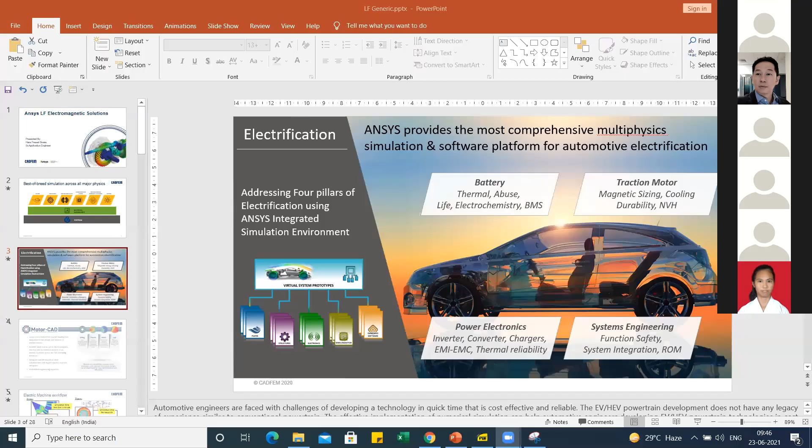Okay, maybe we can start with the first session for low frequency or even high frequency. 25 minutes has been allocated for your session. Mr. Sivala, thank you. Thank you, Eddie, thanks for the nice introduction. Let me start sharing my screen. I hope you guys are able to see my screen, could you please confirm that? Yes, it's all good, yes, go ahead. Thank you, okay. So just let me know in case if my audio or anything is not proper, then I will try to correct myself. Okay, no problems. Thank you, yeah, thank you, Eddie.

So hi, good morning to everyone. Myself, Haraprasad Sivala, and I'm working as an application engineer in CADFEM. And basically, I will take care about this low frequency part.

Before going to the technicalities of Ansys Maxwell, I will give you a couple of slides on what Ansys can offer you on the overall platform and what exactly Ansys is, in a nutshell, just a couple of minutes. So Ansys, I can say, is the market leader in the simulation platform. The reason is very simple, it's purely into the simulation. We don't want, there is nothing into the CAD platform or anything, it is completely concentrated into the simulation platform. And the beauty is it has the footprints in each and every major physics.

You can name with the structures, it might be started, then after they have acquired a lot of solutions like fluids or electromagnetics and embeddeds. Or recently, they have also acquired a couple of simulation softwares on the optical side. So you can understand that Ansys has footprint in each and every physics. The beauty is it's not that we are into every physics, the major physics can talk to each other on a single platform, so that's the beauty of Ansys, and we can integrate those things in a single platform. So Ansys can offer you the best of breed simulations across the major physics, and it can be a one-stop solution for your challenges as well.

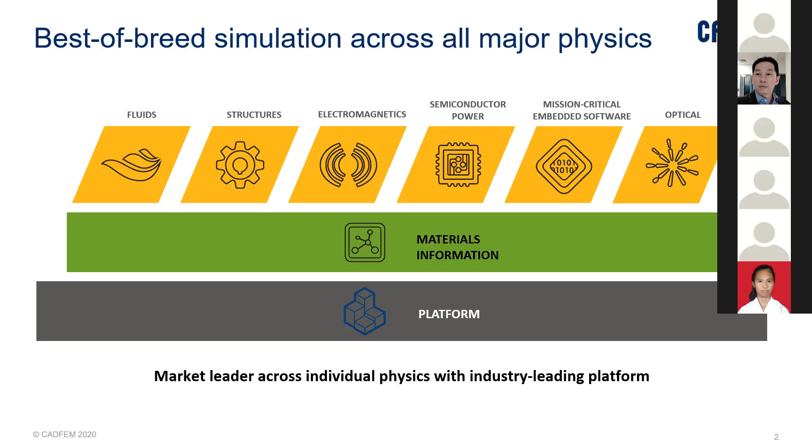This is just one slide where Ansys can offer you, if anyone is interested in the electric vehicle market, Ansys can offer you a 360 degree platform where you can see the major components, might be the battery, or traction motors, or power electronics, or system engineering. So Ansys has solutions for all these major components to address the different challenges from different physics, or different applications. So today's topic would be mostly on this Ansys Maxwell capabilities and what applications it can handle.

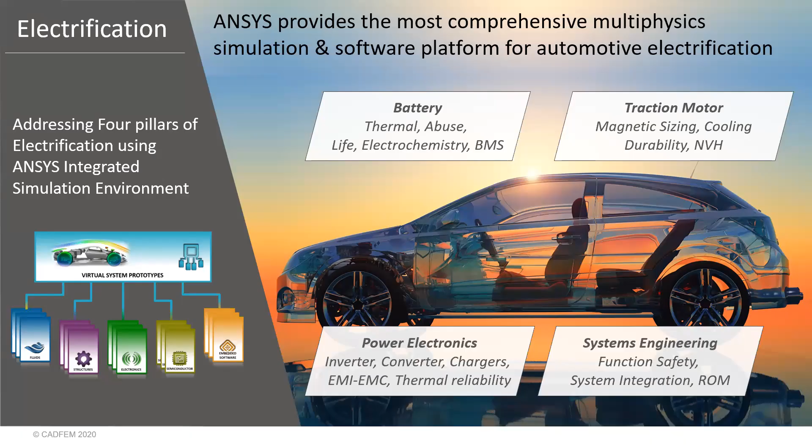If you talk about Ansys Maxwell, I can say this would be the high fidelity, generic electromagnetic software for low frequency. So before jumping into the Ansys Maxwell technicalities, I will give you a brief difference between low frequency and high frequency.

In the Ansys electronics platform itself, we have two things: low frequency and high frequency. Low frequency means the frequency range where that particular application is working, which decides whether it belongs to low frequency or high frequency applications. In our case, the frequency will start from certain zero frequency to a couple of megahertz. There is no hard stop, but it would be somewhere around 40 or 50 megahertz.

You can go up to that. At the same time, high frequency will start from certain kilohertz to gigahertz and more. Of course, there is a band where the frequencies can overlap, and it always depends on which particular application or tool is suitable for that analysis. According to that, we choose whether to go with Ansys low frequency solvers or high frequency solvers. So that is the basic difference.

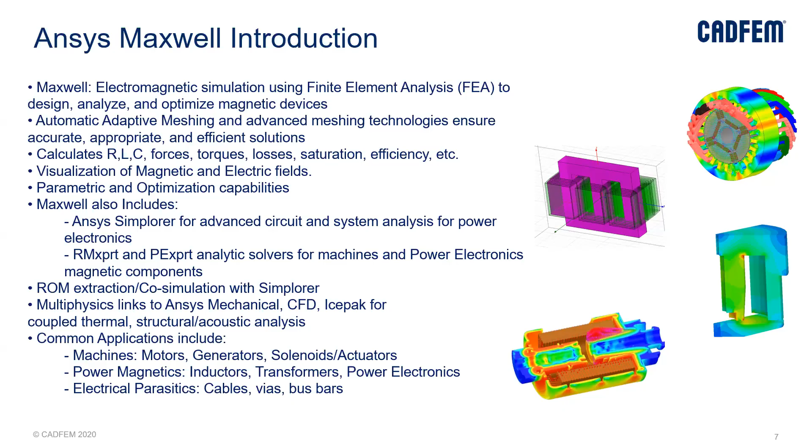Apart from these things, it can offer you the complete set of electrical and magnetic fields. Basically it is built on 4 basic Maxwell equations, where you can take Faraday's law and Gauss's law for both electricity and magnetism, as well as Ampere's law. By using those 4 basic Maxwell equations, they have implemented this Ansys Maxwell solver, which will help us to understand the magnetic as well as electrical phenomena of these particular applications.

And it can also do a couple of optimizations. It has an optimizer inside which will help us do some parametric based optimization. If you talk about post processing, the outcome you are getting out of these things is, if you take any component like an actuator, transformer, motor or generator, it can give you all electromagnetic outputs, like forces for linear motions, or torque for rotational motions, or losses on copper components or steel materials. Or if you want to check the efficiency of a particular component, yes, you can do those things. All these things can be given to us by this Ansys Maxwell solver.

And it has its own set of solvers. It has some certain template based solvers, you can see RMxprt and PExprt, which I'm going to talk about in the coming slides.

As well, the beauty with this Ansys Maxwell solver is it will take some reduced order model technology, which is nothing but you can do the field calculations here, and this field component, this physics based component, can be integrated to your system level solvers, where you can use this physics based model without losing the accuracy. That's what we call reduced order model technology.

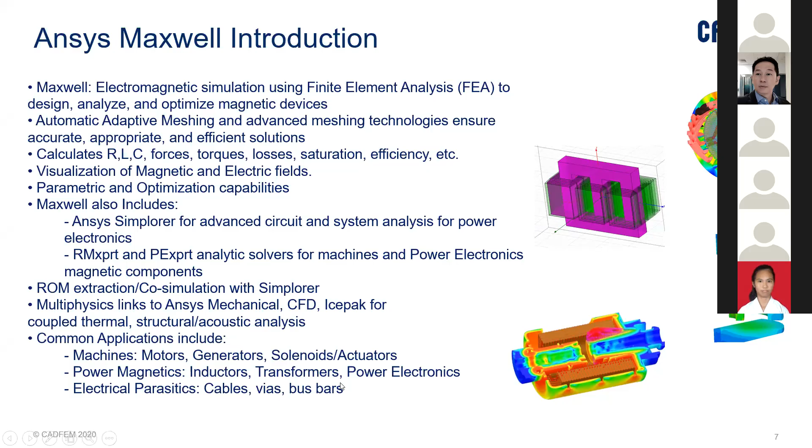As mentioned in the previous slide, we have a couple of advantages in the Ansys Maxwell solver itself. Once you go with that particular licensing, you will also get this basic Simplorer as well as RMxprt and PExprt. These are, I can say, dedicated 1D platforms basically.

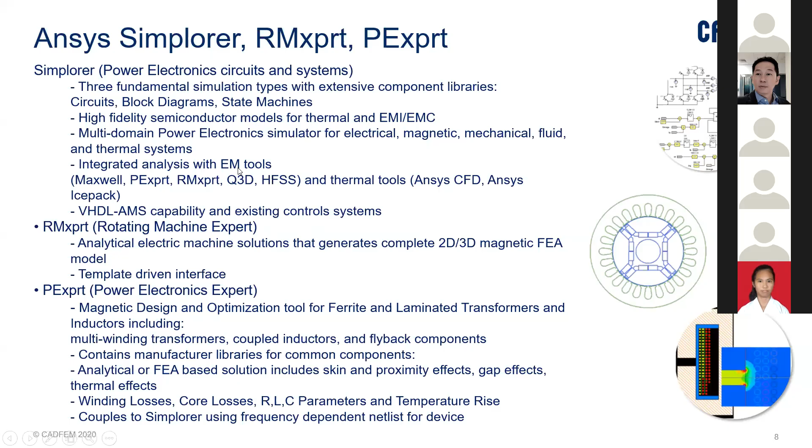Simplorer is a kind of system level solver, or a multi-domain system level solver, where you can integrate physics based models into these particular solvers. It already has template based models for electrical, magnetic, mechanical, fluids, or anything you can take it as. It has already defined 1D models, and you can just drag and drop to work with these particular things.

The next one is RMxprt, which is nothing but rotating machine expert. If somebody is interested in electrical motors or generators, they can work directly with this analytical solver for initial level calculations, and it is integrated inside Ansys Maxwell. There is a direct coupling between RMxprt and Maxwell. Once you set up the model in RMxprt, it can directly create an FEA model for us.

PExprt is the same, which is nothing but the power electronic expert, which will give us an idea on electronic transformers or any kind of structure, toroidal structures, or inductors. All those things can be solved here. This is also a kind of 1D platform, which can be integrated to Ansys Maxwell for high fidelity FEA simulations.

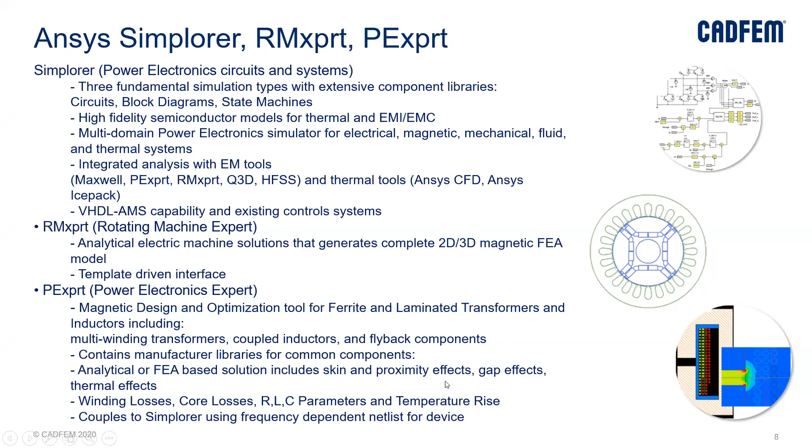Once we're done with the basic geometry setup or anything, then you can directly go for material modeling. Obviously, when dealing with high fidelity solvers, the major important thing is that we need to concentrate on material modeling. How accurately you model the materials, that much accurately we can get the particular application performance. That's where Ansys, I can say, is a step forward compared with other solvers.

You can model either linear or non-linear materials, isotropic or anisotropic properties, which are changing the material properties with respect to direction, or you can check temperature dependent materials also. We can also create models with temperature dependent materials, as well as consider hysteresis modeling, where you can consider minor loops also.

If you want to properly model core losses, we have temperature dependent core losses that can be modeled here. And if you want to check magnetostriction, or inverse magnetostriction, where you want to check mechanical stress on magnetic components, that kind of advanced material modeling can be done in Ansys Maxwell solvers.

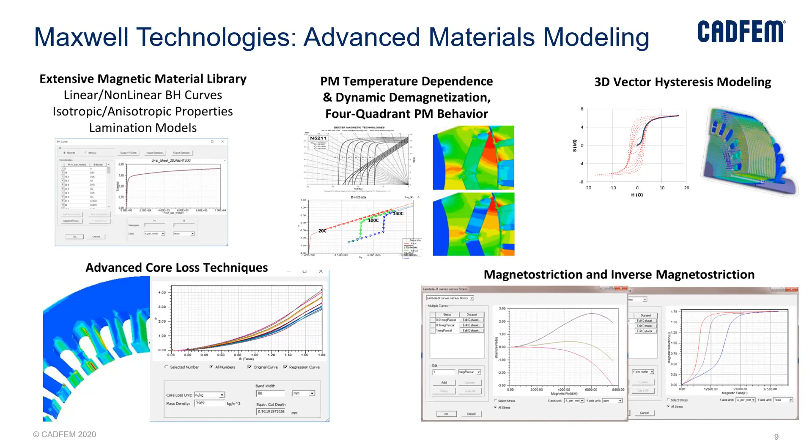The next part would be obviously the meshing part, because we are dealing with finite element mesh. Here, as an electromagnetic engineer, we are not pretty sure on finite element methods. But still, Ansys can offer you the technique called auto adaptive meshing technology. Even if you are not familiar with the finite element method, it will offer you automatic meshing.

Once you define the number of iterations, it will automatically define the proper and accurate mesh for us to reach finer and finer results.

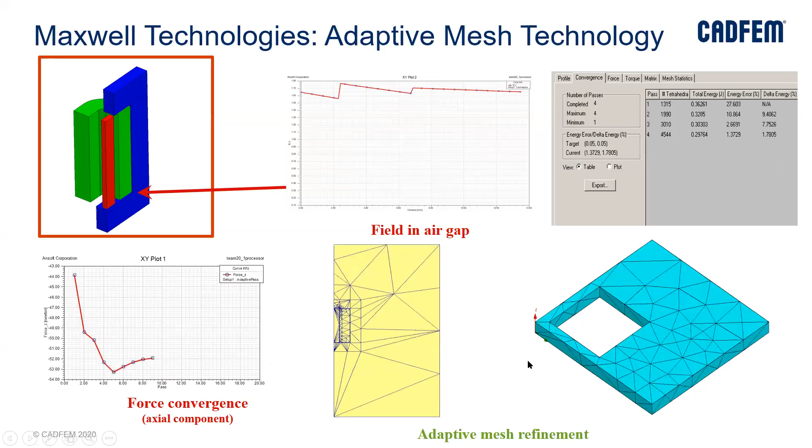In case you are still not satisfied with this auto adaptive meshing technology, we can use manual control mesh, whether it might be first order or second order elements. You can control this manual mesh and reach high-end accurate mesh elements. There are different kinds of manual control mesh techniques available, which we can use to properly get the dense mesh on our applications.

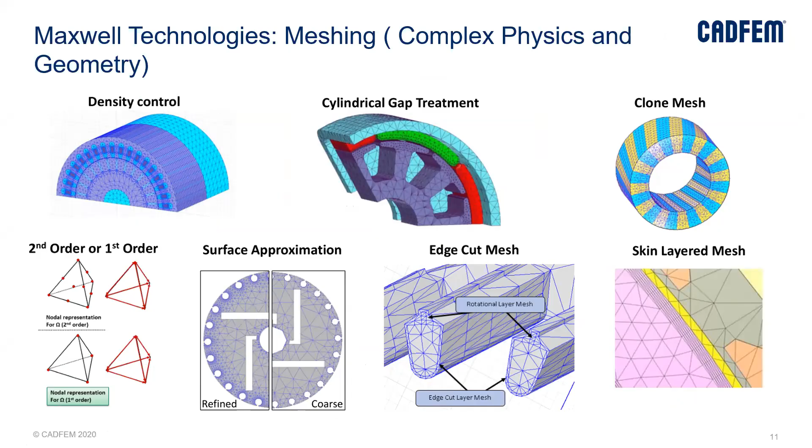When dealing with high fidelity solvers, time is a major concern for simulations because it's dealing with the finite element method. So to speed up the simulations, Ansys Maxwell has certain solutions like TDM and DDM methodologies, where it will do multi-threading. You can use multiple cores to run the simulations, as well as run simulation points simultaneously. This reduces the amount of simulation time spent on a particular simulation run, as well as increases productivity.

And with this, you can properly model accurate ROMs. Here is a test case. In the initial cases, it took somewhere around 15 days, but after scaling up with respect to these HPC, TDM methodologies and using HPC performance, it can reduce it to 5 hours. You can see how drastic a change has been implemented here, but of course it needs a finer number of cores to reach this position.

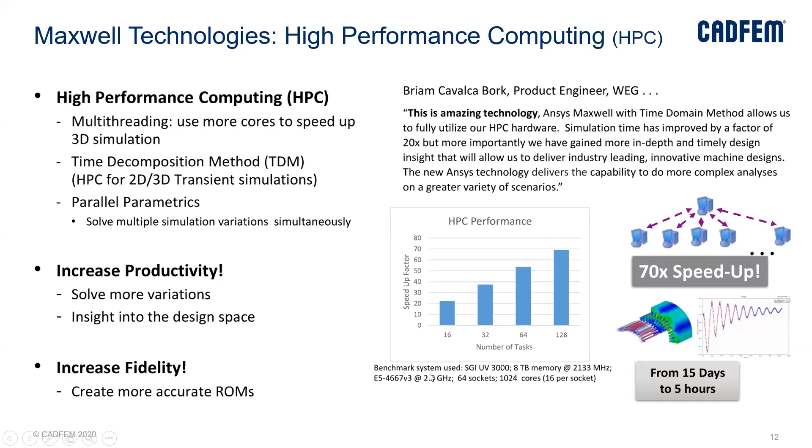So far we discussed completely the electromagnetic side, but we haven't discussed the multi-physics environment. What if some challenges come from the multi-physics environment, which are related to or combined with the electromagnetic solvers? How can Ansys handle these problems? Here is the solution.

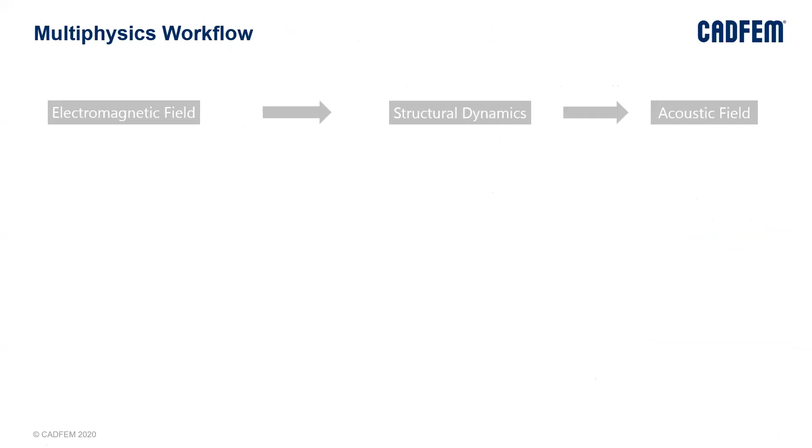For example, if you take a motor and want to check the vibration behavior, I have simulated the motor in the electromagnetic solver called Ansys Maxwell, integrated into our platform called Ansys Workbench. The electromagnetic solver solutions are directly coupled to the mechanical solvers. We are extracting the loads, or the electromagnetic forces, on the stator tooth, and these are directly mapped onto the mechanical solver to check the vibration behavior and structural deformation on the stator tooth.

The problem here is you can run at a single RPM, or when running at multiple RPMs, it can also simulate. That is the beauty of Ansys and these platforms. Either the mechanical and structural part, or the acoustic part, everything can be integrated in a single GUI with just a drag and drop methodology. We no need to export or import files or anything, it's a simple drag and drop methodology.

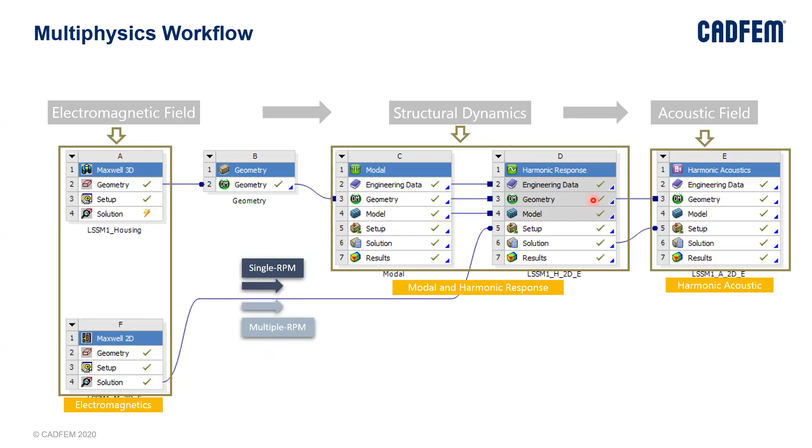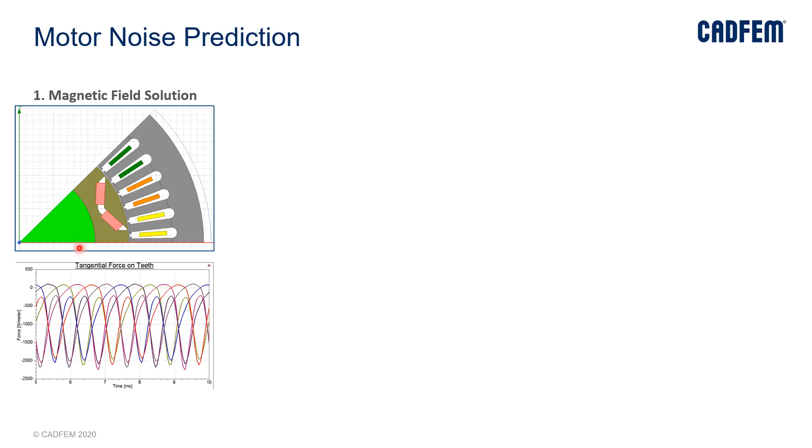Here you can see this simple approach I discussed previously. This is an electromagnetic simulation, electrical motor simulation, where we are computing the forces, and these forces are exported here. These are then, on the mechanical side, used to compute vibrations, and these vibrations are given as an input to the acoustics. Finally, you're able to hear the noise also.

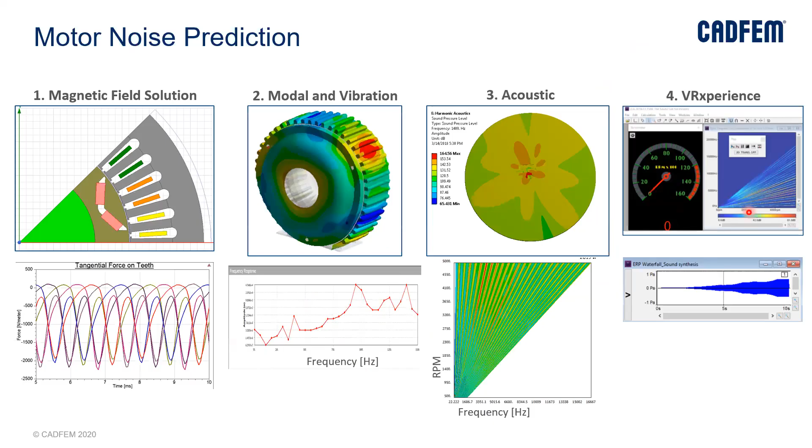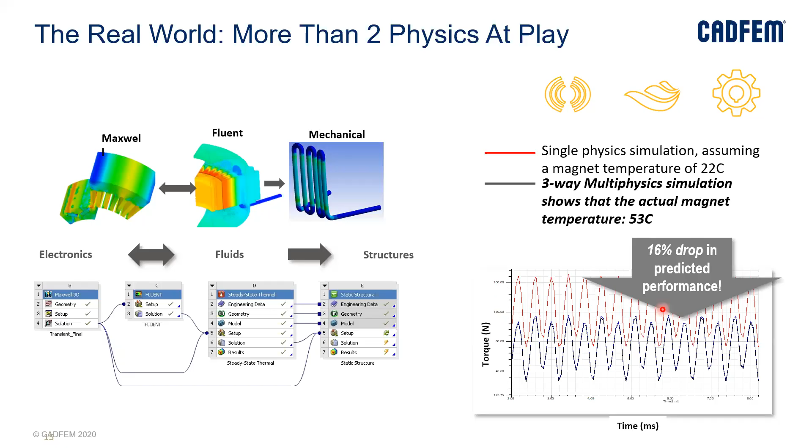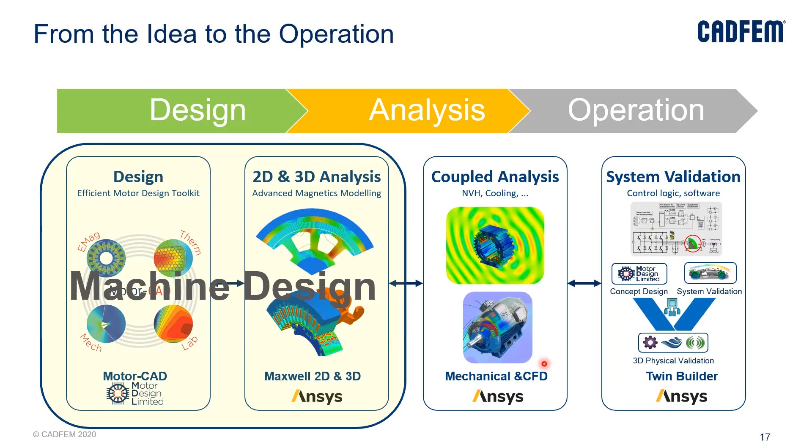So that is basically the capability side. There are a couple of slides on capability and applications, which I'll go through quickly. This is an environment for motors, where there's a design phase and an advanced phase of modeling. Once done, the next part is coupled analysis, as discussed in the previous slides, such as mechanical vibrations or temperature scenarios. Finally, this motor can be integrated into system level solvers to check how well the motor performs in the complete system.

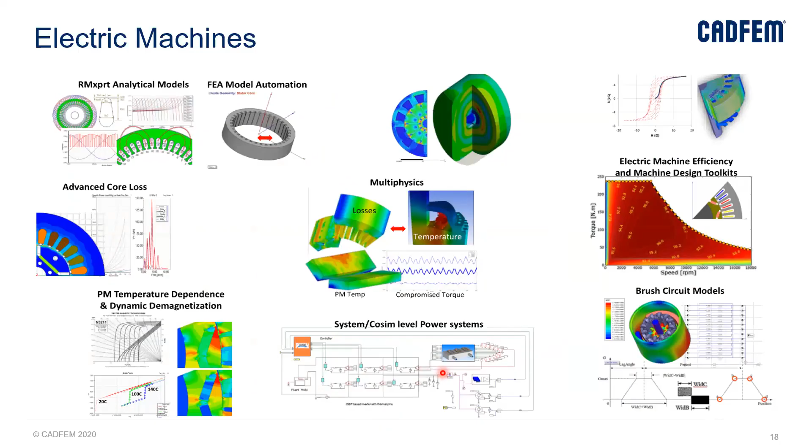Okay, here is the electrical machines, and there are a couple of things you can do, either initial phase analytical approaches or a detailed FEA approach. If you want to do the multi-physics environment, or check efficiency maps, or do complete system level analysis, or demagnetization effects, all those things can be addressed here.

And even for transformers also, if you take transformer or anything, that can be solved using the Ansys Maxwell solvers.

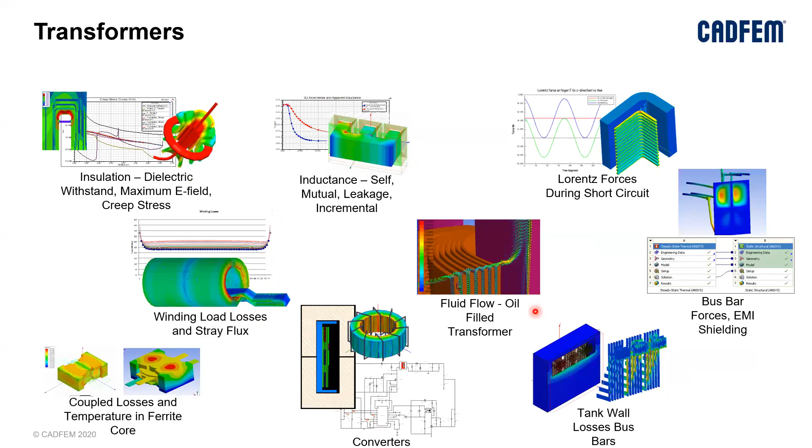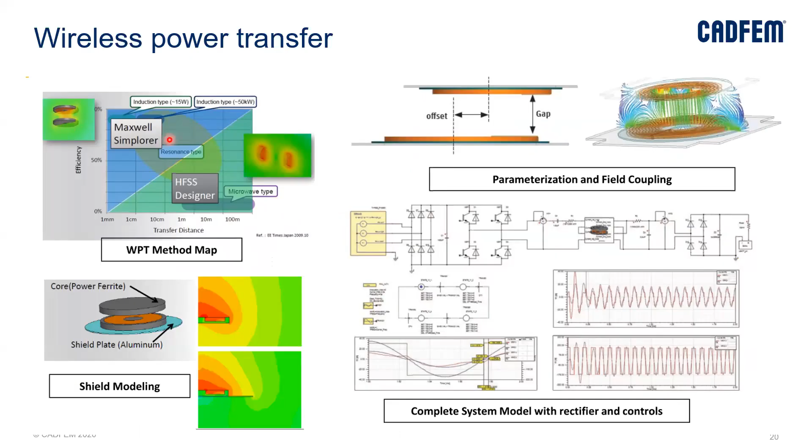And if somebody is interested in wireless power charging, that can be simulated either for inductive, or for resonance type inductive, or for microwave type wireless power transfer. Of course, the microwave type power transfer can be handled on the high frequency side, but for the induction type, yes, we can simulate in the low frequency solver called Ansys Maxwell.

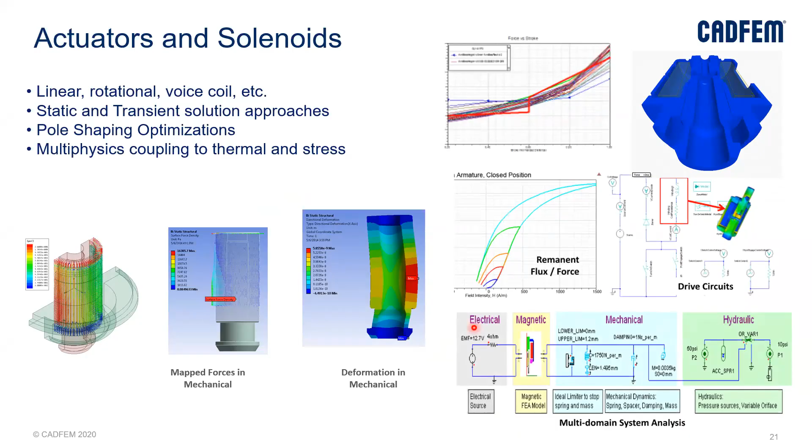And even for actuators also, if somebody is interested in actuator simulations, because that is also an electromechanical component where you can predict the linear motion. You can see what is the stroke position with respect to the distance, and what is the force acting on that particular plunger, and when you are exciting the coil, how much force is acting on the plunger - does it fine enough to overcome the spring force or not. So all these kinds of simulations can be handled using this electromagnetic solver.

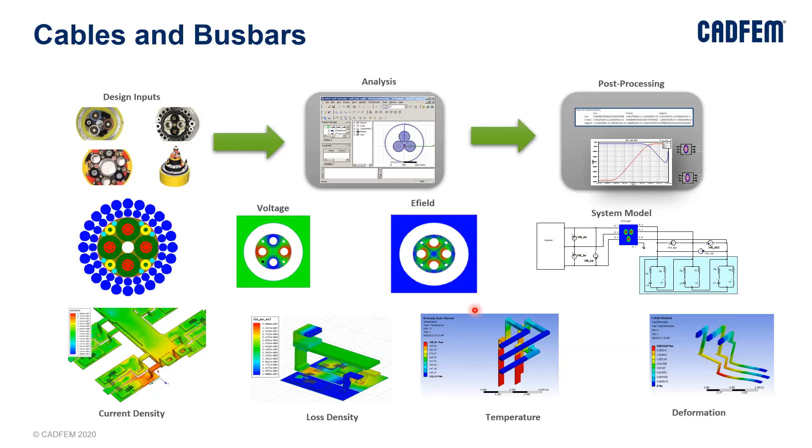And if you are interested in bus bar simulations, to check the losses, it means the bus bar insulation - if you want to check the dielectric capabilities of the insulation, as well as the structural deformations or the thermal performance of those bus bars or cables, all those things can be simulated using Ansys Maxwell solvers.

And if somebody is interested in sensors, the electromagnetic sensors - you can call them variable reluctance sensors, which you can find in bike wheels basically. And hall sensors, you can see eddy current flaw sensors, where you are using these things in tube, the boiler tubes it might be, to check the porosity and all.

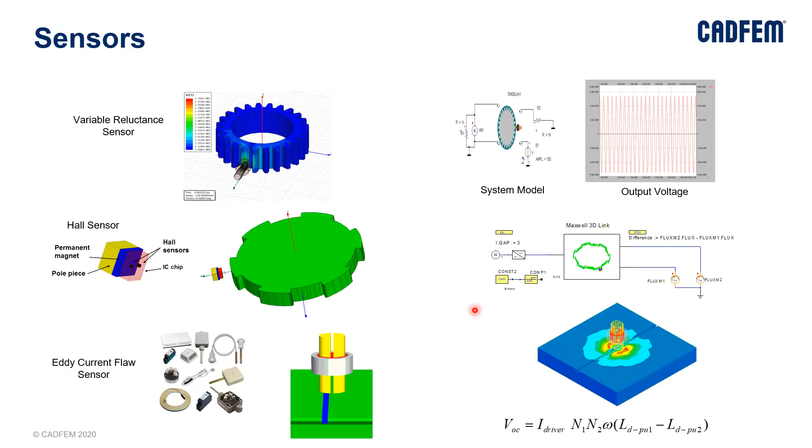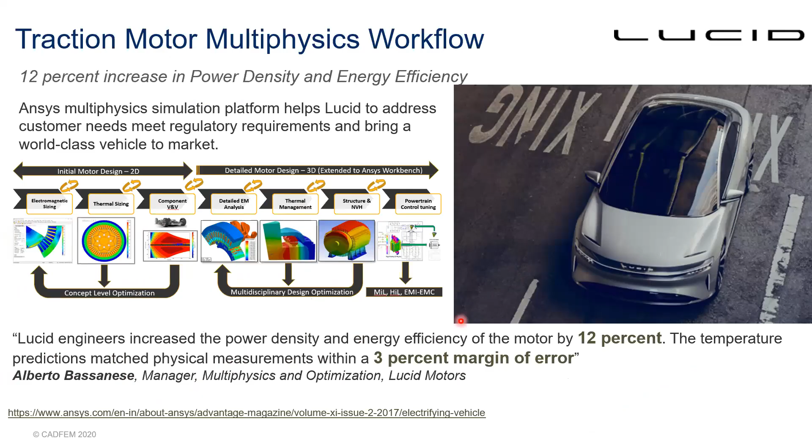So those are a couple of applications, and here is a case study on traction motors. You can see here, this is a competitor for Tesla on the EV side. They have used our solution to implement the electrical motors from a design phase to the complete system level solvers. You can see the comments from the Lucid guys, which we can share with you also. These are the case studies, so with this, I would like to stop.

If anyone has any queries, you can feel free to ask.

Okay, thank you, Mr. Shivala, for your informative and insightful presentation. I think we have seen how great and how capable this Ansys Maxwell is for low frequency applications. Just to save time, we would like to move on to the high frequency presentation, HFSS, by Mr. Tama.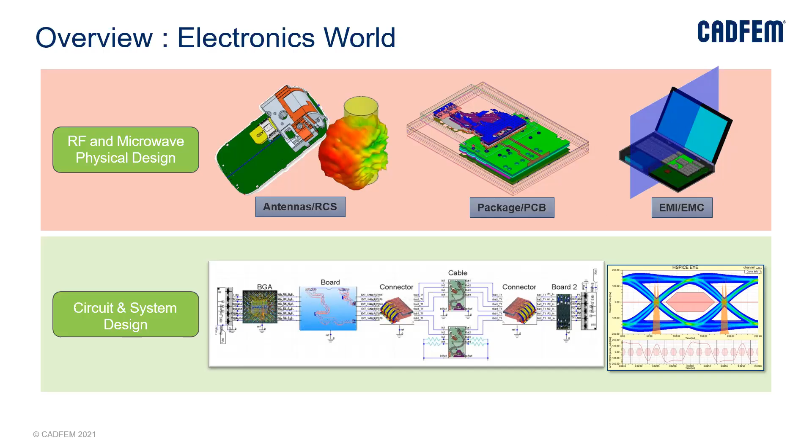The beauty of Ansys is that it is definitely a multi-physics platform, where you can do electromagnetic studies, thermal studies, as well as structural studies. Whatever losses come from the electromagnetic solver can be coupled to study the thermal behavior, and those thermal losses can be coupled to study the structural behavior also. So it is a complete multi-physics platform.

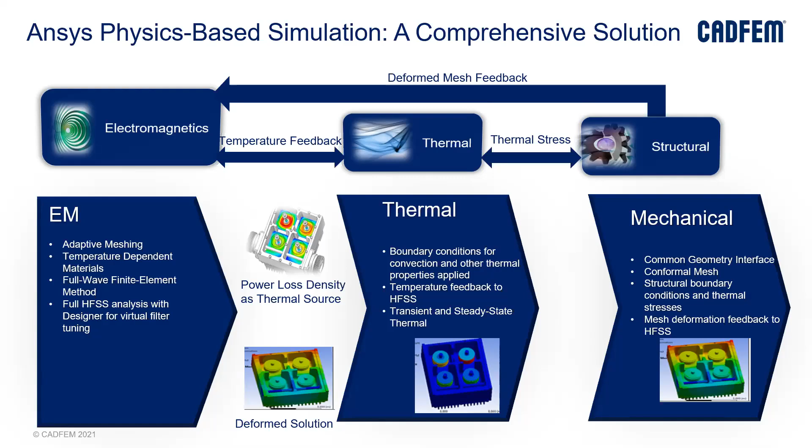In terms of transmission line basics, at low frequency, like AC signals or other low frequency signals, transmission is not a problem. The instantaneous voltage and current values remain the same across all positions of a cable or any transmission medium. But once we move up in frequency, the instantaneous current and voltage values change, and that causes the impedance to change.

So we call it characteristic impedance. Whenever characteristic impedance changes, the maximum power won't be transferred. The maximum power transfer theorem tells that the source and load impedance have to be the same. If it is not the same, there will be losses. That's why at high frequency, those components have to be properly designed so that the transmission losses are kept as low as possible. If it is more, there would be a larger problem.

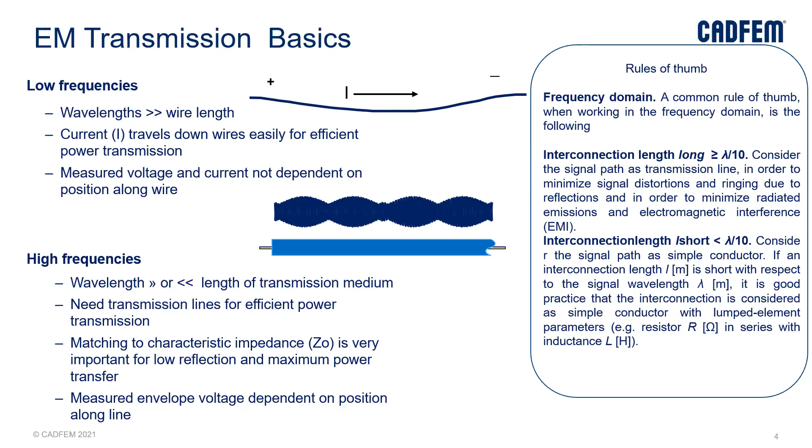Mostly we study this kind of losses in the frequency domain, not time domain. But in time domain also, some simulations can be done, though majorly we study this kind of losses in the frequency domain.

This is just one example of how losses happen in a high frequency device, but it's applicable even for low frequency devices also. You can consider any device, or what we call DUT, device under test, to be a simple lens. Any light incident on a lens - some light would be reflected back, some light would be refracted or transmitted within, across the medium.

So instead of a lens, it can be an antenna or any EM device - the same thing happens. Some energy would be reflected, some energy would be transmitted. When we divide the incident, reflected, and transmitted energy, we can extract parameters like the return loss. If it is a filter, it will be a loss. If it is an amplifier, we can see the gain of the amplifier. We can see the group delay. So all these studies can be done.

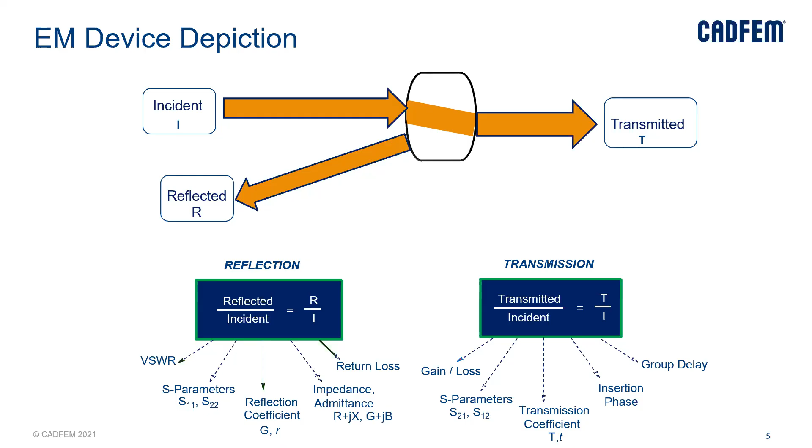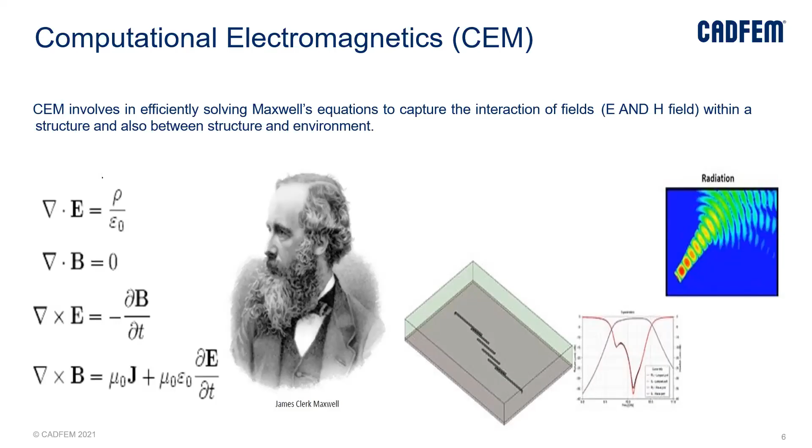In terms of solver, in order to study all these things, we need some solver. We have to solve some equations in order to capture the electric and magnetic field - those equations we call Maxwell's equations. Our tool HFSS solves Maxwell's equations majorly using the differential form, which is why it's known as the FEM method. But in Ansys, we have both FEM and MOM methods - I'll talk about that in the upcoming slide.

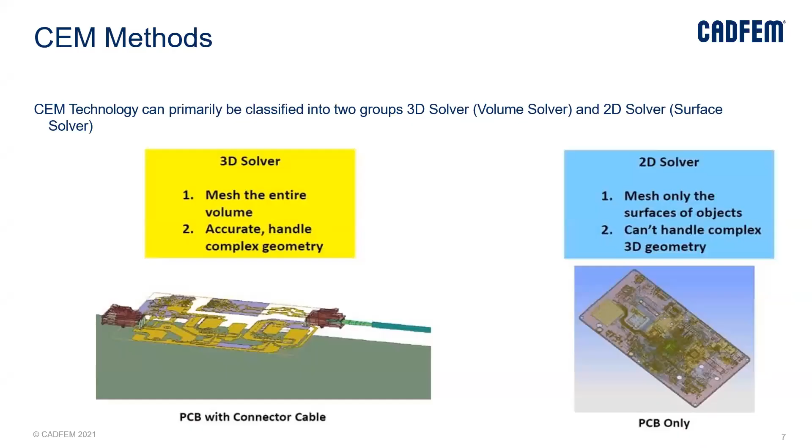Depending on the application, we have a 3D solver as well as a 2D solver. If it's only a PCB kind of application, the 2D solver is fine enough. If it's a 3D cable or 3D connector kind of application, then we need to use the 3D solver. The difference is, in the 2D solver, it only does surface meshing, while in the 3D solver, the entire volume would be meshed.

HFSS is a full wave 3D electromagnetic solver. When I say full wave, it computes the electric field in all vectors - Ex, Ey, as well as Ez. Similarly, for the magnetic field, it computes Hx, Hy, and Hz. That's why it's known as a full wave 3D electromagnetic field simulator. No assumptions are made - it fully solves all the Maxwell equations and all the coupling between them without making any assumptions. That's why it is an actual Maxwell equation solver.

Any 3D model can be imported in HFSS. There is no restriction. Any arbitrary 3D model can be imported in HFSS.

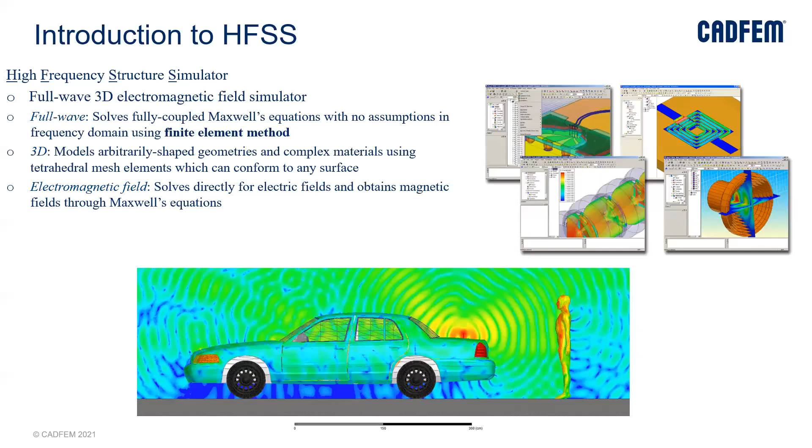Yes, it solves for electric field. Once we get the electric field, it will use the electric field data to obtain the magnetic field. And then once the electric and magnetic field is obtained, it will calculate the surface current.

It will extract the S, Y, Z parameters. So this is the common CEM approach. You will be importing a structure, dividing the structure into small segments, and then we get the result.

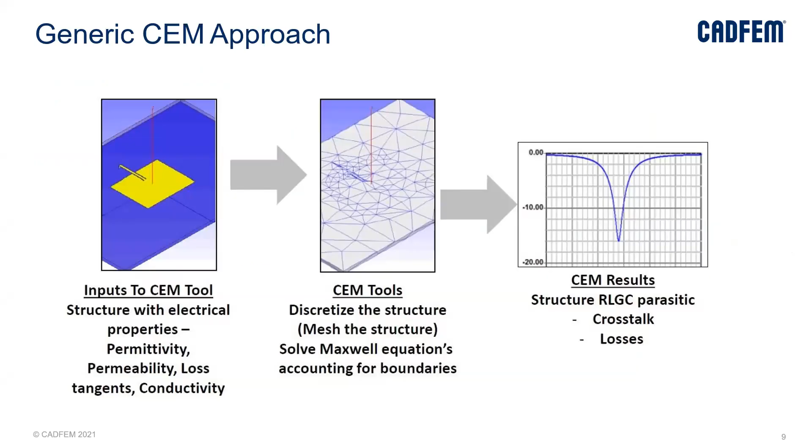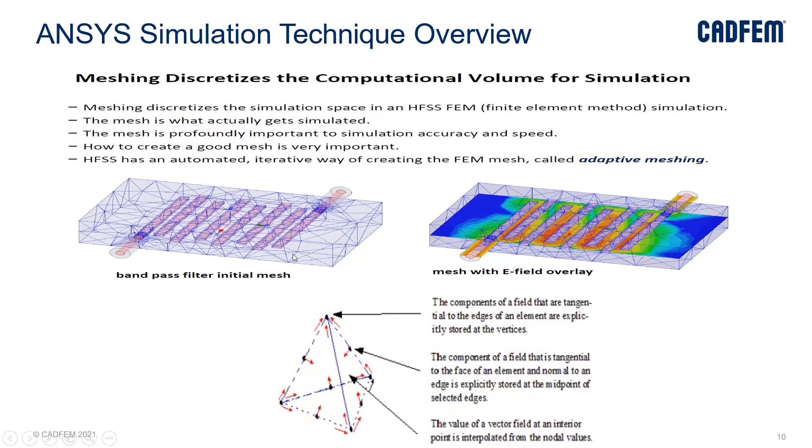But the kind of technique we have in Ansys, as you can see here, it is a band pass filter. Each mesh is a tetrahedral, and at all the vertices and midpoints, the electric and magnetic field would be obtained. Now the beauty of Ansys HFSS is that it has something known as automated adaptive mesh refinement process, meaning you don't need to worry much about mesh.

As per the requirement, as per the frequency, software will automatically give you the best mesh. So it won't do over meshing, it won't do under meshing, it will generate the optimal mesh. So it is an iterative process.

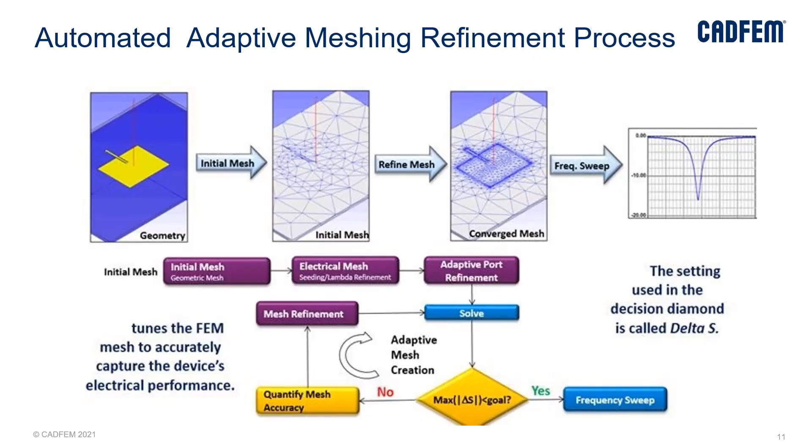Step by step, in every pass it will fine tune the mesh. Wherever the error is more in that particular area, it will increase number of mesh, number of tetrahedral. As you can see in the animation, at every pass the number of mesh is increased. And when number of mesh is increased, automatically it is increasing the accuracy of the simulation. So that's why the accuracy is very high for this kind of electromagnetic simulations using HFSS.

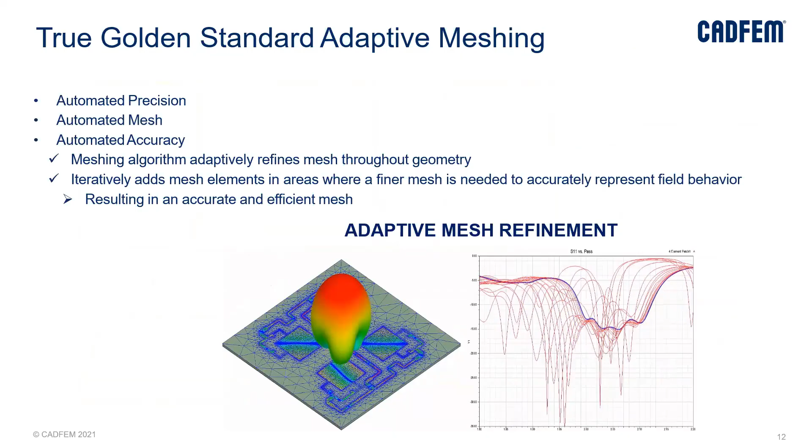And the key output parameter is S parameters. So not only S, but you can obtain S, Y as well as Z parameters also. So once we solve the electromagnetic problem, then we can use those solved data to extract S, Y, Z parameters.

As I told, S parameter already I have explained in terms of length. So it is a ratioed measurement, input by output. If I know the input and if I know the output value, and if I do the ratio between input and output, I can calculate the losses like gain. All those things can be calculated.

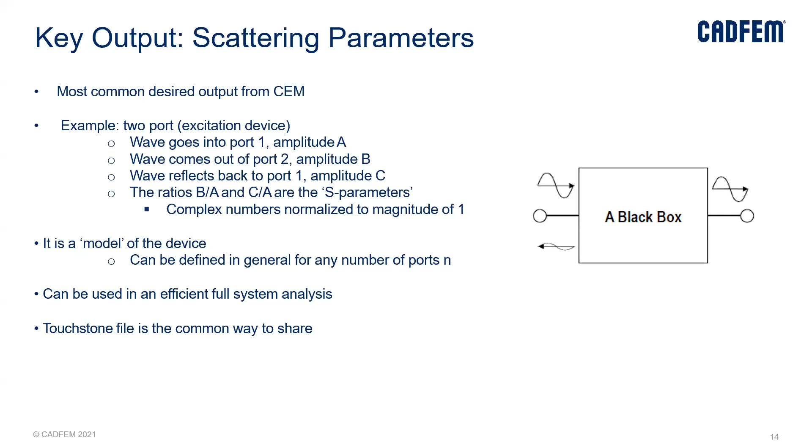So in terms of solver technology, FEM, finite element method, is the heart and core solver. But depending on the application, we have integral equation solver also. Commonly this method is known as MOM method, and we have physics based solver also. So if somebody is working on a very large platform, then you can use this physical optics solver also. It uses the diffraction and refraction concepts.

And we have transient solver also, and we have 1D or circuit solver also. So it can do linear, it can do non-linear, as well as transient circuit simulation. And we have optimetrics also. If somebody wants to do optimization kind of studies and all, we have optimization capabilities also.

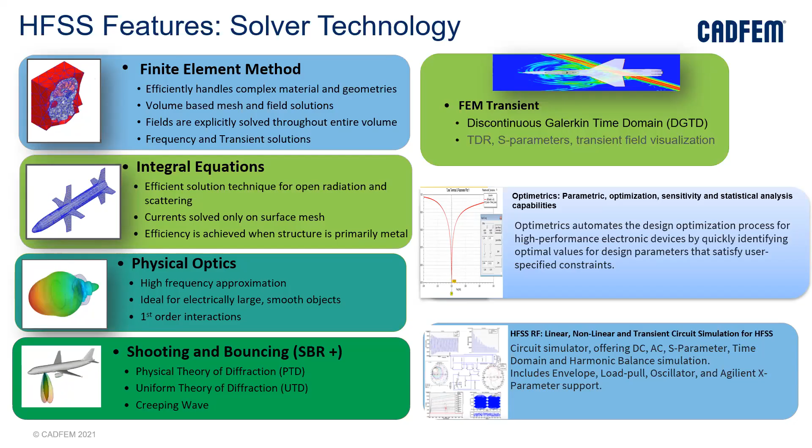Some of the applications of HFSS are antenna array, then platform integration, which we also call antenna platform study. The microwave components like filter, waveguide connectors can be simulated, designed. Then RFIC and MMIC board. Then in aerospace and defense, in ADAS systems it can be used, in IoT and RFID, in high-speed interconnects, and similarly for EMI EMC also it can be used.

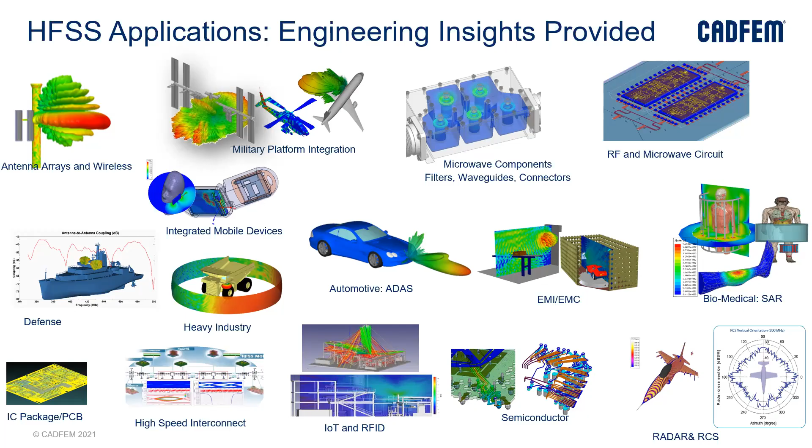I'll try to talk about the few applications in the upcoming slides. This is just the HFSS

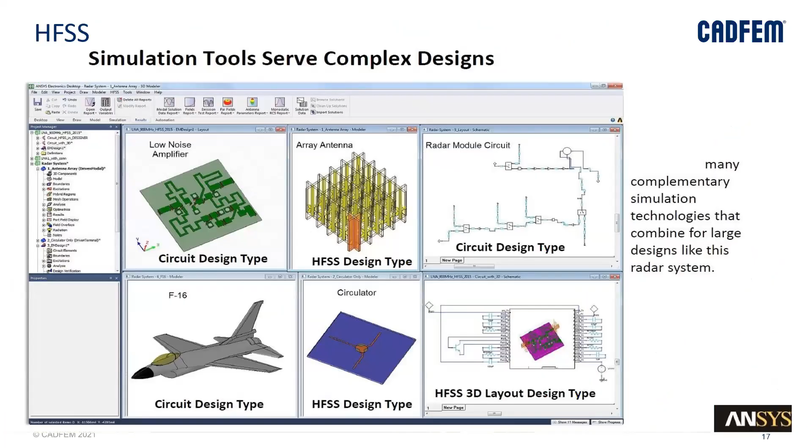GUI. So depending on the application, different GUIs are there. And this is just the HFSS GUI.

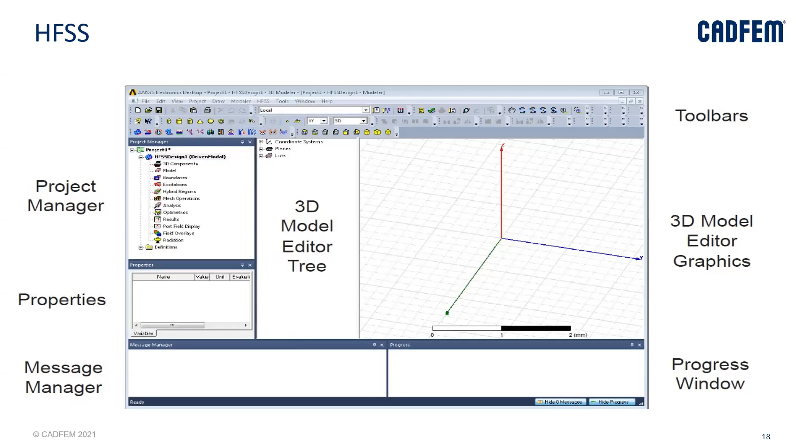In this you can see this is the 3D model tree window, and in the top side toolbar there is a property window, message bar. So once somebody starts using the tool, then all these GUIs become more and more familiar.

And in terms of workflow, doesn't matter whatever application you are working on, this is the generic workflow. You will either design your structure or import your structure, and then you have to assign the material, like permittivity, permeability, or what kind of materials you want to use. We have a dedicated material library that can be used.

Then the boundary has to be defined, boundary conditions, like in which area you want to mesh, you can define those areas. Then if it is antenna kind of application, you have to define the antenna ports. We also call it antenna excitation.

And then simulation setup, it is nothing but telling the software from which frequency to which frequency I want to solve, and then it will do the meshing part. After I give the frequency and all, it will...

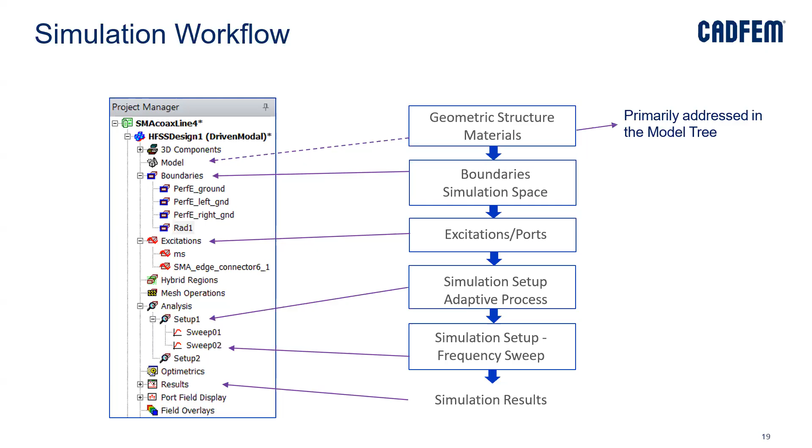After I run the simulation, it will do the remeshing part. It will generate the fine mesh. Once fine mesh is generated, it will give you the result. And the result would be, as you can see, electromagnetic field, 3D electromagnetic field, even S parameter, Y parameter, Z parameters, far field, near fields, all this can be obtained.

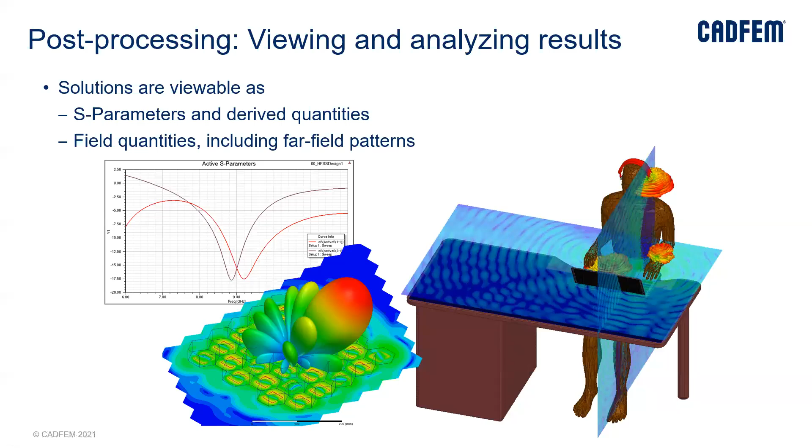In terms of antenna, we have something known as the antenna toolkit. There is a dedicated toolkit for antenna, which we also call antenna synthesis.

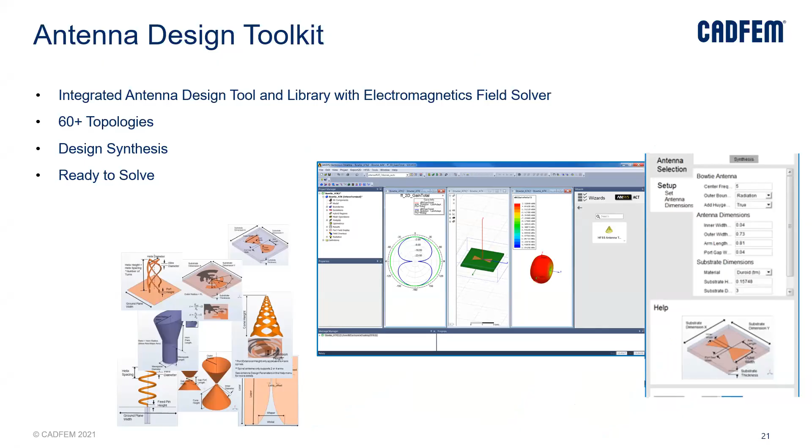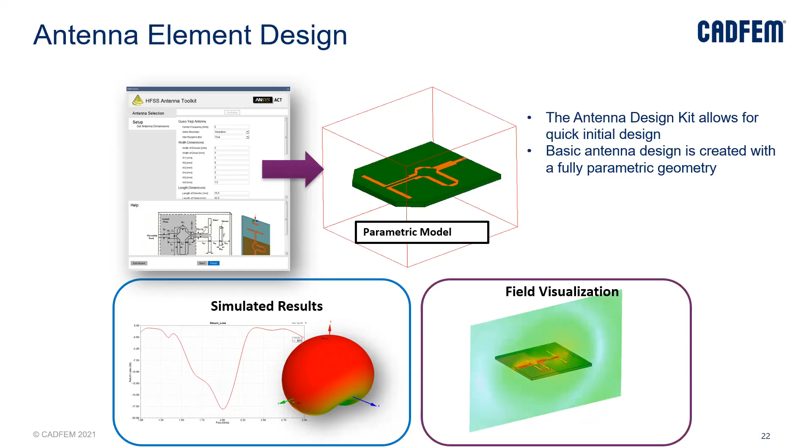There are 60 plus predefined antenna topologies. You just need to give the frequency of interest, and the tool will automatically generate the antenna along with a 3D model, which is a parameterized model. That means after the 3D model is created, you can make changes in the geometries and all. Once you solve, you'll get the simulated result, like S11 return loss of the antenna and the far field of the antenna, such as gain and beam width, all of which can also be calculated.

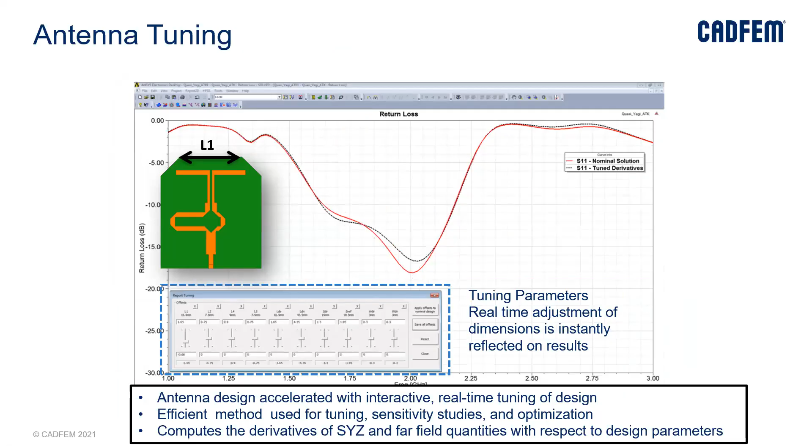There is also real-time antenna tuning. If somebody wants to change the width and height of the antenna patches, those changes can be done, and you can see the variation in return loss. We also call this real-time antenna tuning.

If somebody is working on a phased array kind of application, phased array means the number of antennas is more. There might be 100, 200, 300, or 500 antennas in a phased array. Solving 500 antennas using our common method becomes very time consuming and will take longer. That's why there is a dedicated method known as the finite array domain decomposition method.

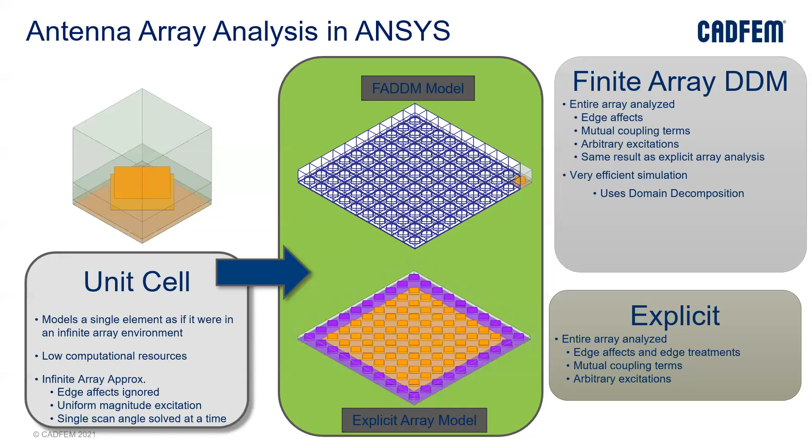This method makes sure that accuracy is not compromised, and it generates high fidelity results in less time. In an antenna array, there are multiple antennas, so this method will only mesh a single antenna. It generates the mesh for one antenna, and the same mesh is reused for the entire antenna array to give the result. By reusing this mesh instead of meshing everything, we save time. That's why this method becomes very helpful when working on larger antenna array applications.

You can also see the field across the array, like the electromagnetic field. Sometimes people work on different RF components also, like amplifiers, waveguides, and power amplifiers. Everything can be designed and simulated in Ansys, and everything can be brought into our circuit tool, the 1D tool.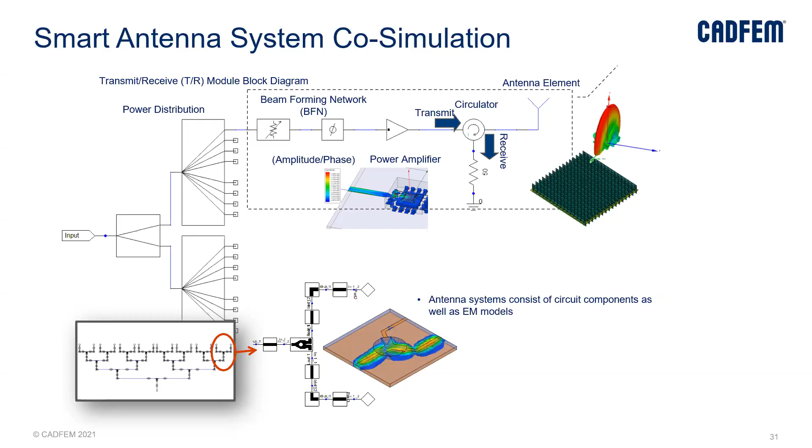If somebody is interested, they can also do system level simulation, putting everything together to see how it works. If it's an antenna array application with a beam forming network, you can create your beam forming network and then do amplitude shifting, phase shifting, and all, to check how good or bad your antenna is.

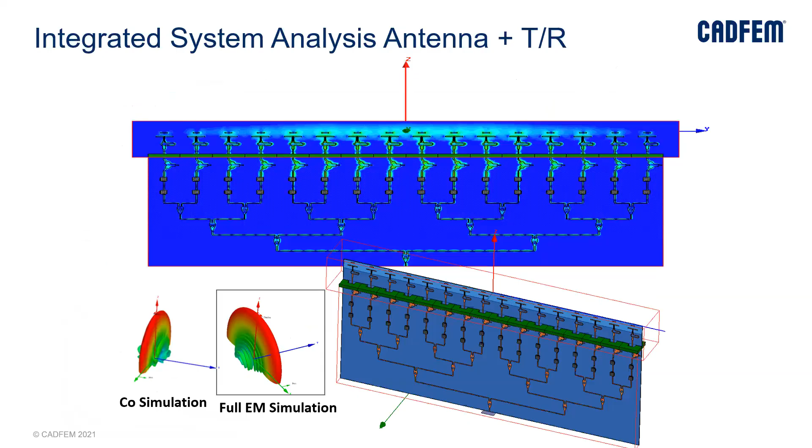This is one example of the entire antenna system. This is the actual 3D model, showing the antenna and the beam forming network. Everything has been simulated in Ansys. You can do this entirely in 3D, or you can simulate the antenna, bring it into the circuit tool, design everything there, and do EM co-simulation also.

In terms of circuit simulation, as I mentioned, we have DC, transient, linear as well as non-linear simulations, like harmonic balance, and optimetrics is also supported. There is system level analysis too, where you can do time domain, frequency domain, as well as mixed domain, which includes both time and frequency domain.

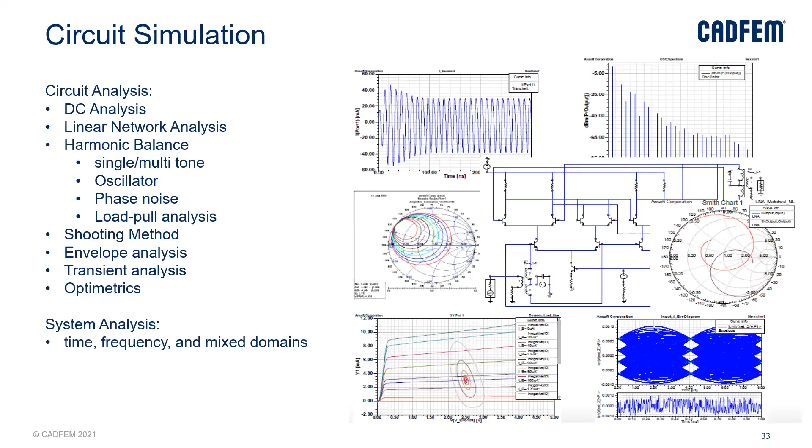This is just a few examples of RFID. Nowadays people talk about IoT and RFID, and Ansys can be used to completely model and design RFID systems.

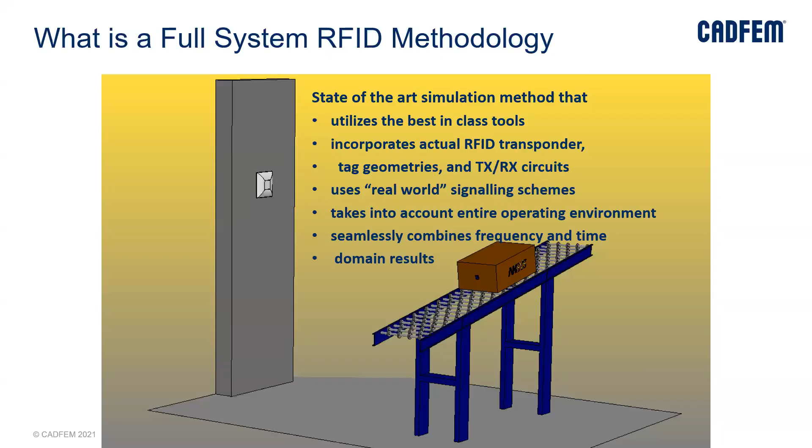This is a case study - one of our customers, which I can't name, designed an RFID transponder using our HFSS. The operating frequency of this transponder antenna is 920 megahertz, and the input impedance is 50 ohms. The polarization is circular polarized, and the return loss obtained was minus 15 dB. This is one example of transponder antenna design in HFSS.

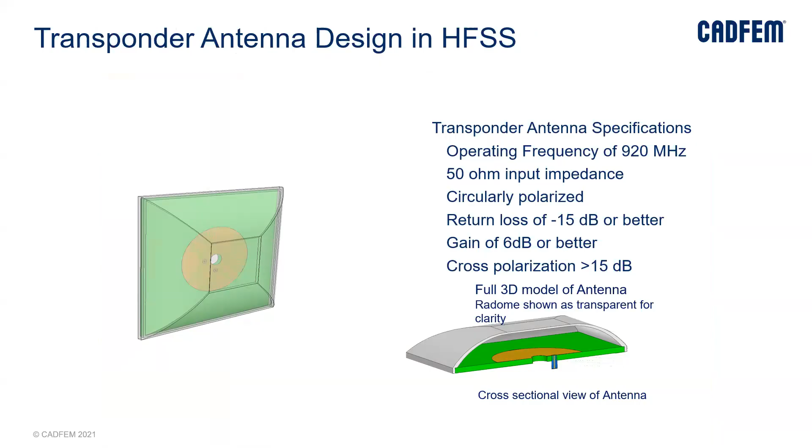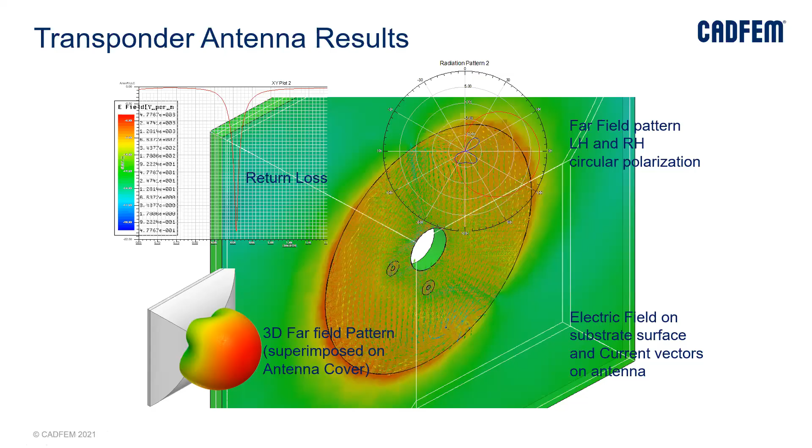And these are some of the results. This is the return loss, and this is the 3D far field pattern. This is the radiation pattern, and in 2D we also call it a polar plot. This is the left-handed and right-handed circular polarization that has been done. This is just one case study of the transponder antenna.

Some of the simulations that HFSS, like high-end simulations, does are human exposure studies. There is a body known as FCC that specifies up to what limit some device can radiate in terms of power density, and it has to be measured. This table one is the limiting table, or limit table. It tells how much electric and magnetic field in how much frequency range a particular device can transmit. As per the table, this criteria has to be met by mobile phone companies and others.

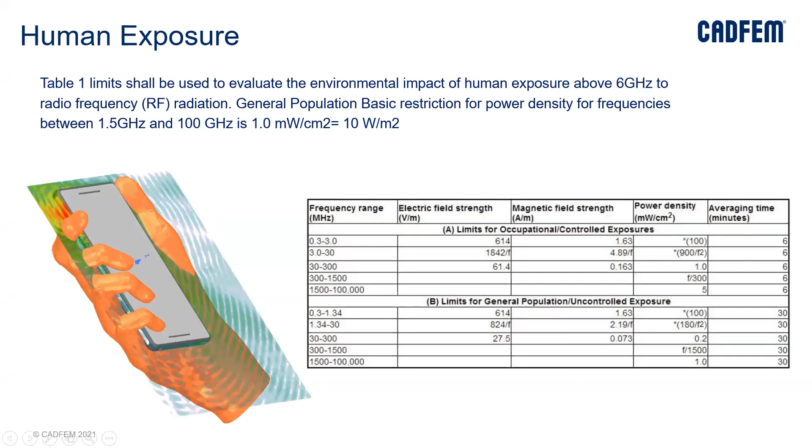We also call it SAR simulation, specific absorption rate simulation. This is one example of that, showing power density for frequencies between 1.5 gigahertz and 100 gigahertz. So this kind of testing can be done.

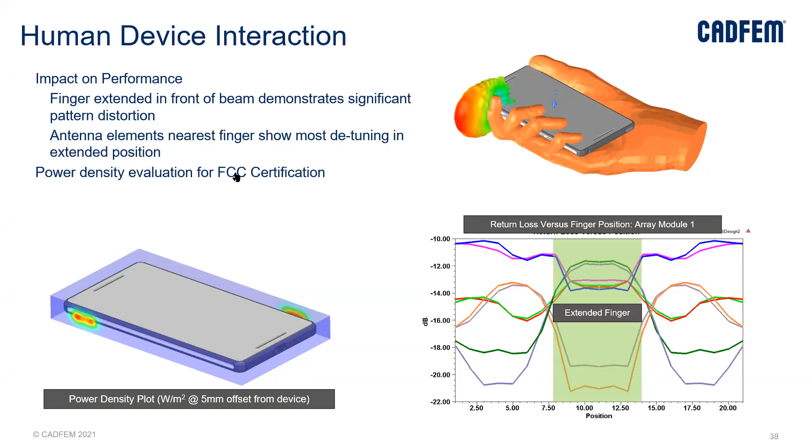This is another example of human device interaction. Whenever I tend to keep my mobile phone in my hand, and if I move my fingers, my antenna performance will also be different. As you can see here, the antenna radiation pattern is varying. So this kind of study can be done, like return loss versus frequency, or at one frequency, what is the return loss versus finger position. And again, you can do power density evaluation for FCC certifications and so on.

This is another example of radiated emission testing, the CISPR 25 standard. Left hand side is the actual CISPR 25 standard, right hand side is our Ansys test bench model. As you can see, as per the standard, the same has been modeled. We also call this pre-compliance testing, so this kind of pre-compliance testing can be done.

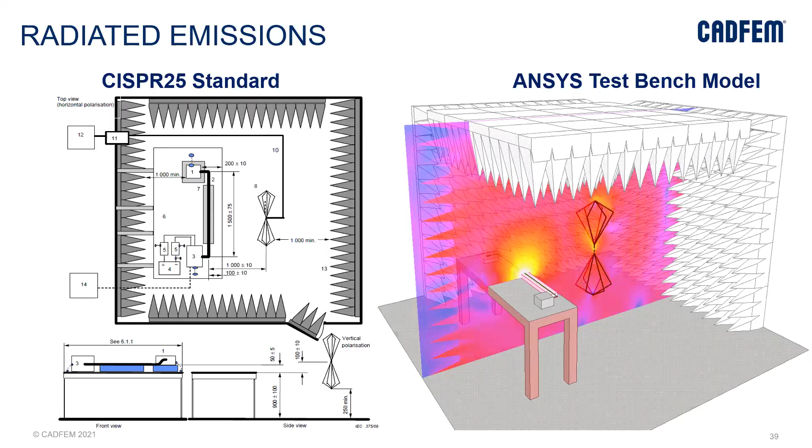This is another example of a radiated emission study. This is the actual anechoic chamber. There is a microwave oven here, and there is a source inside the microwave oven. So whatever electric and magnetic field is coming out of this oven has been captured by the antenna.

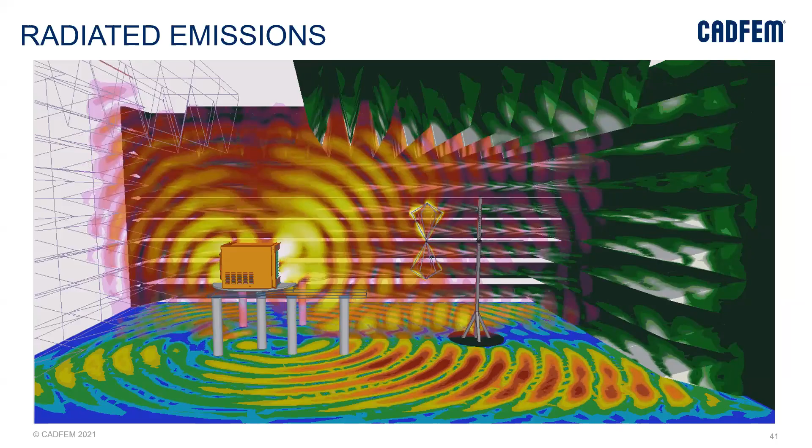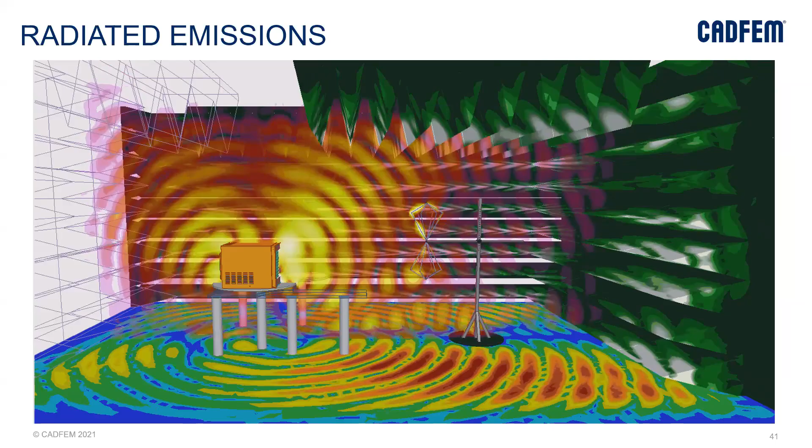That's all from my side. In 25 minutes, it was really difficult for me to cover everything, because this is a very big area, a very big application. If anybody wants to know about any particular application, you can ask me or write to our team. We will do a dedicated session on any of this technology, we don't have any problem. But in this session, if you have any questions, please feel free to unmute yourself and ask, or type it in the chat column. We will be happy to answer. Thanks for your time.